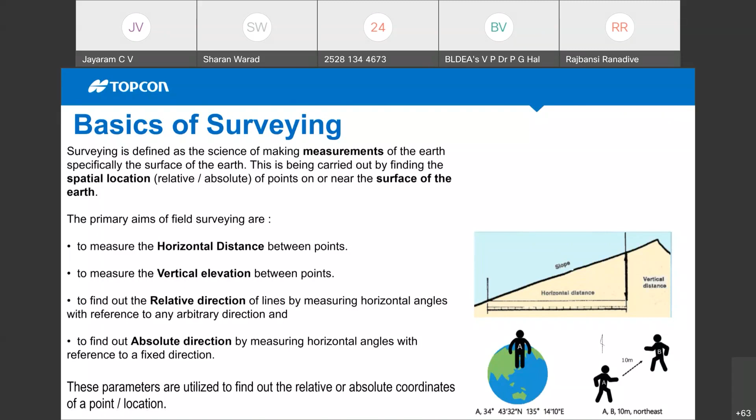We use surveying in many applications in day-to-day activities, like boundary surveys, land topography, river surveys, and the delineation of corridors for wide usages like construction of roads, tunnels, airports, and pipelines.

Basically, in boundary surveys, what we do is take satellite imageries and delineate boundaries by imposing cadastral data onto them, demarcating lands. Today the Government of India has floated a program called NLRMP, National Land Records Modernization Program, where entire cadastral data has been converted into digital maps using different surveying techniques - few states are using remote sensing, and few using codes using GNSS.

Everyone is aware that land topography maps are required to prepare detailed engineering designs for flow analysis. River foundation surveys are used to have a proper passage for ships incoming and outgoing, to remove excess sand - a process called dredging.

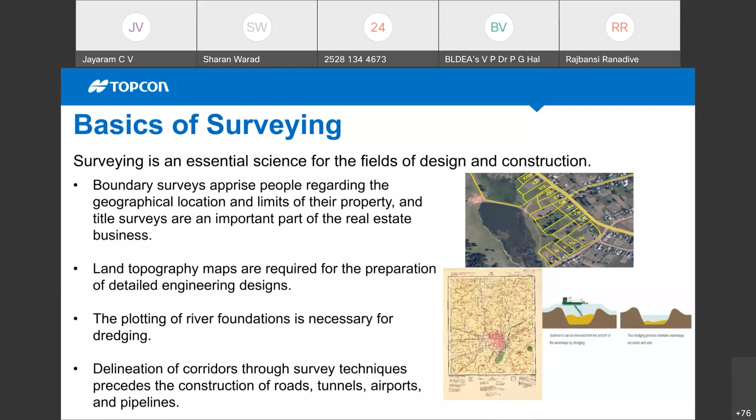We used different types of surveys for different applications.

Previously, what we used were conventional surveying techniques, like pace measurement. Pace measurement is where people walk with their feet, and a normal walking step is about 0.75 meters or 30 inches, while a double step returning to the same foot is approximately 1.5 meters or 60 inches. So that's what we used to do - pace measurements - and most commonly we used chain, tape, steel, or enforced vinyl type equipment.

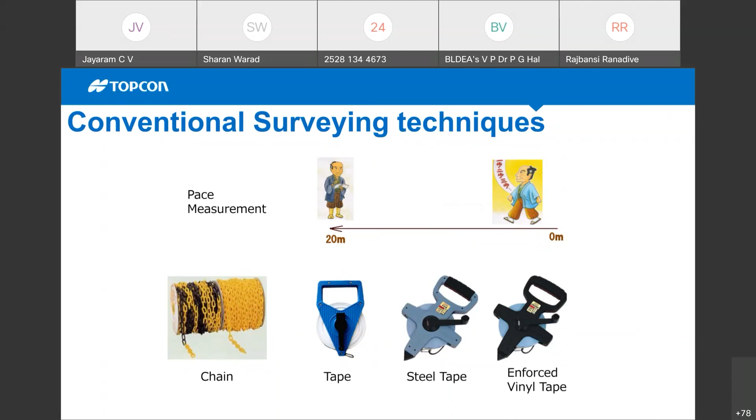By modernizing and combining different engineering platforms, today we are at the platform where we use modern surveying equipment. Today we will focus on automatic level, electronic theodolite, total stations, global positioning systems, LiDAR, and UAVs. These are all case studies which we have already done in real time, and we'll focus more on the techniques, not going deeper into the subject, as this will be covered by the upcoming speakers in their detailed presentations.

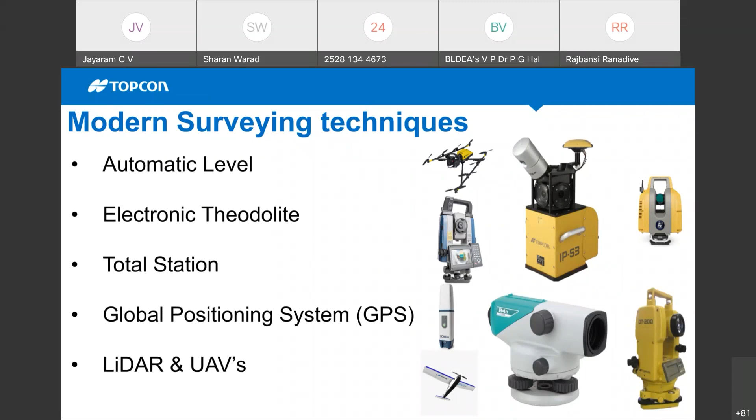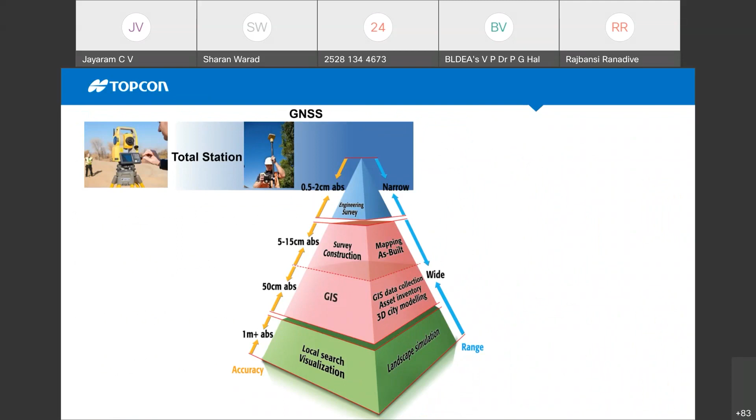So the different types of surveys will be taken as per the application and as per the accuracies which generally people tend to have. For an accuracy of 0.5 to 2 centimeters absolute accuracy for engineering surveys, basically we'll use total stations, GNSS, and 3D laser scanners.

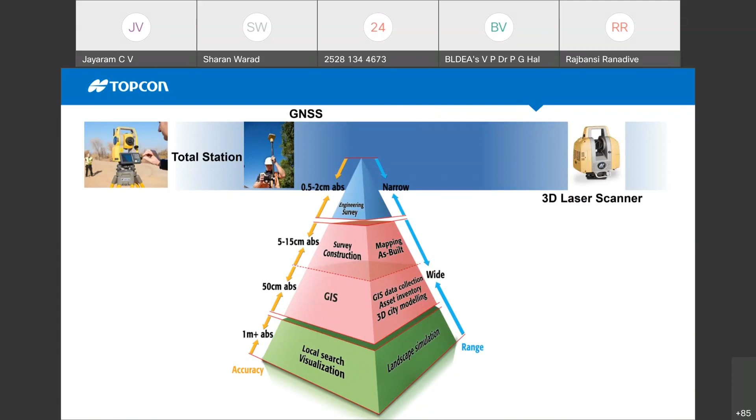For survey construction mapping as well, where we expect 5 to 15 centimeters of absolute accuracy, we'll be using mobile mapping systems or GIS, where we collect GIS data using GNSS, and on satellite images we superimpose this data, collect all that information, and present it for the required purposes. The more the range, the less the accuracy.

For having 1 meter absolute accuracy, we will use UAVs or UAS - unmanned aerial systems like drones - where we take photographs, and these photographs are then processed using photogrammetric technique, and we extract digital elevation models, digital terrain models, surface, contours, etc.

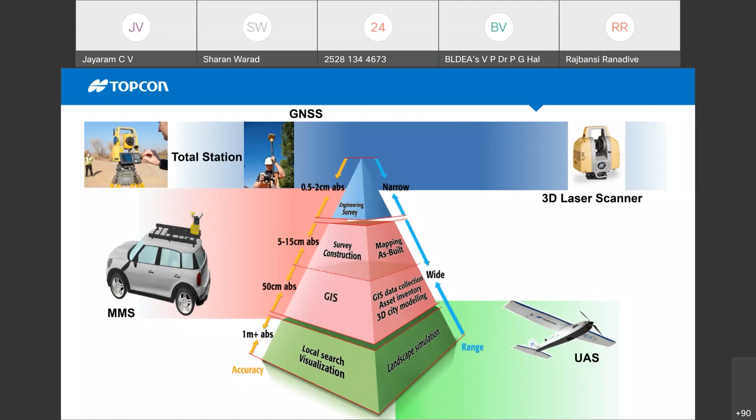So first we'll see about levels. Leveling survey - basically, though we are using all the modern equipment like GNSS and LiDAR, still for establishing the control network and to have geodetic control, we are using auto levels to have vertical control. Basically, this vertical control - people still believe in doing it with auto level itself.

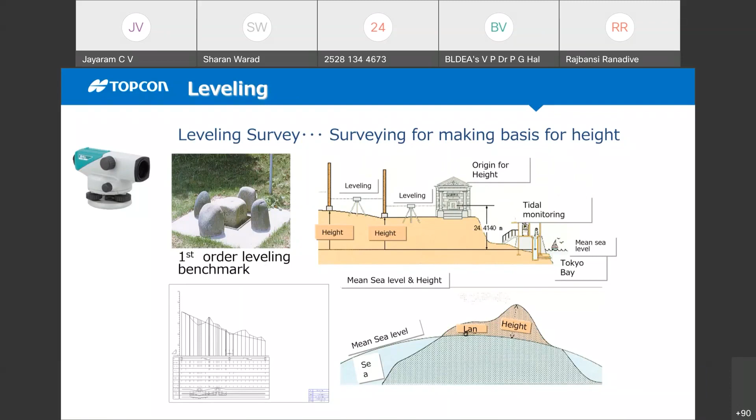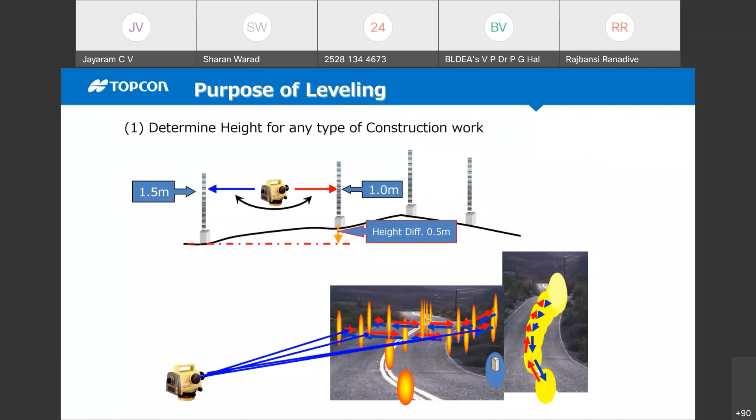By using these auto levels, we create first order leveling benchmarks, and we get MSL mean sea level heights by using geodetic corrections. So where we use this leveling is basically to get the height of a particular terrain - it could be a road or any construction site where we require this height.

In various construction works, like bridge construction, the level should be at the same height. For that purpose, we use our auto levels where all the pillars are checked to see whether they are at the same height or not, to maintain certain heights.

While installing pipes and constructing dikes to maintain the particular slope where the flow has been designed, for slope setting of drains, we use auto levels again. And even for deformation studies, where we constantly monitor a particular piece of land periodically, we can have information on how a particular area has deformed - we can use auto levels for deformation studies too.

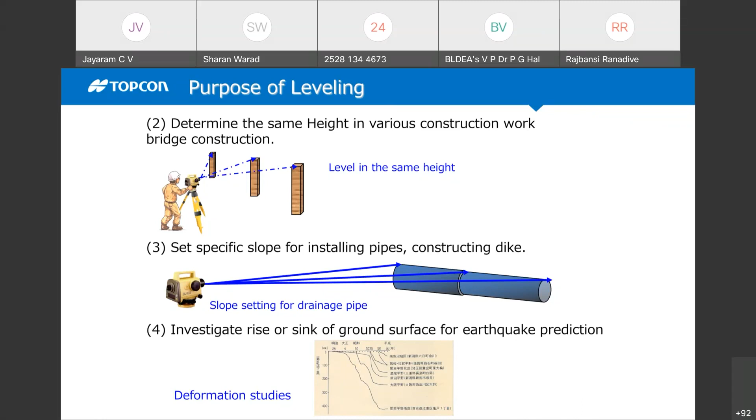Moving to electronic theodolite - yesterday Professor Dashrath sir made clear about electronic theodolite and EDM. Basically, what Topcon is offering for electronic theodolite will have an EDM built in nowadays. The electronic theodolite will have options to measure horizontal angle and vertical angle.

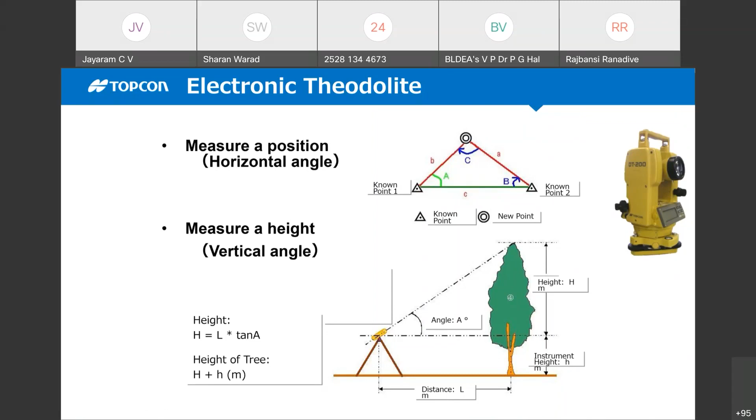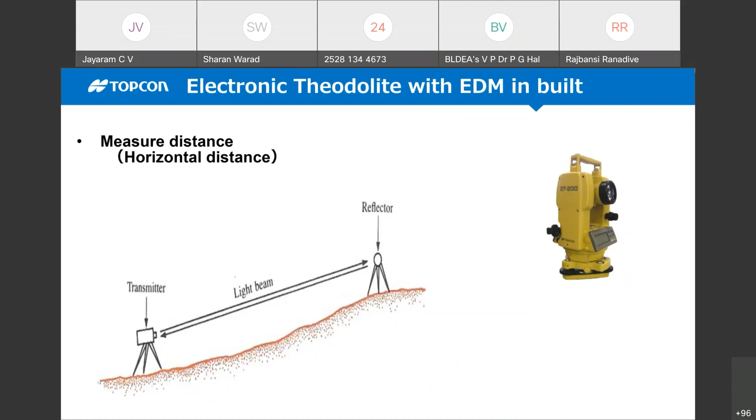Along with that, we can measure the horizontal distance - there is an instrument which transmits infrared rays, and it hits the reflector, and that reflected light travels back to the transmitter. There the microprocessor calculates the time traveled, so the particular slope distance or horizontal distance is given on the screen itself.

So there are two types of electronic theodolites. One is the optical type, where we have a protractor pattern directly - like the protractor we used in a geometry box - and we read the display on the instrument itself. The second one is digital type, where we can see the horizontal and vertical angles directly on the screen itself.

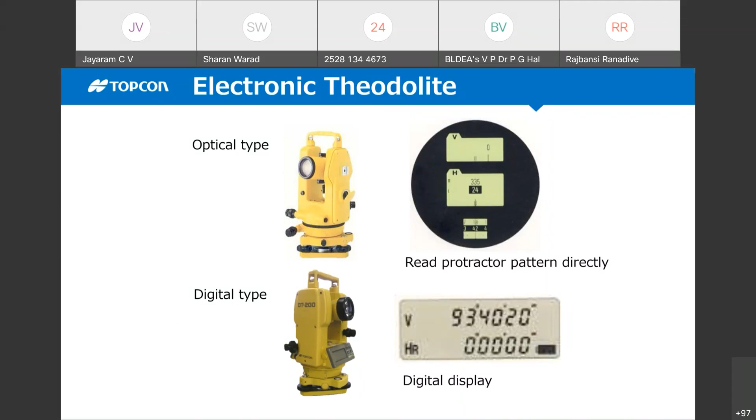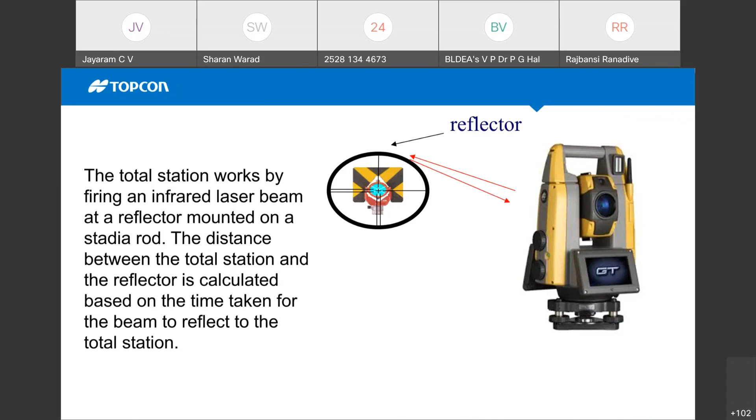Yesterday I tried to give a pictorial representation of how a total station works when we fire an infrared laser beam and a reflector is mounted. A reflector is nothing but a prism on the stadia rod which a person will be holding, or it would be kept stationary to measure that particular area. When we set this infrared rays, it will directly hit that particular prism and comes back to the station, where it calculates the beam reflection and gives the horizontal distance and angles for our design purpose.

So what types of total stations are there, and based upon different applications, the total stations will vary based upon accuracy also. There are basic type, non-prism type, Windows CE type, motor driven type. Motor driven types are nothing but robotic total stations, and also imaging type and monitoring types.

Monitoring types are very precise ones where we use them for deformation monitoring, dam structure monitoring, or any construction activities happening nearby where we require monitoring to avoid any mishap of the structure falling. For these types, we use the monitoring type, which is very precise.

So what is angle accuracy and distance accuracy? Angle accuracy, when we say 1 second, 1 second is 1 mm at 200 meters, so 50 centimeters at 100 kilometers away. When we say distance accuracy of 2 mm plus 2 ppm, ppm stands for parts per million into distance. If we roughly calculate, this is 4 mm at 1000 meters, so we can add this into the distance which we have covered.

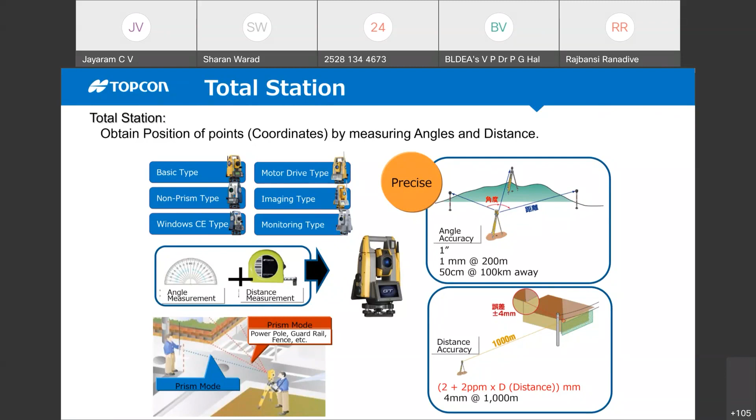Yesterday there was a question regarding the advantages of having a Windows based TS rather than a Linux based TS, so I tried to put together some pictorial explanation and a brief about that.

The advantages of having a Windows total station: we can have a calculate function on board, and we can create surface contours and do volume calculation, we have advanced loading functions, and we can do surface stakeout in the field itself with the background surface visible. We also have traverse adjustment on board, and there is a vast library to import and export formats, supporting IFC and AutoCAD as a background, and we can stake out on that particular road. These are all the additional functionalities of having a Windows total station.

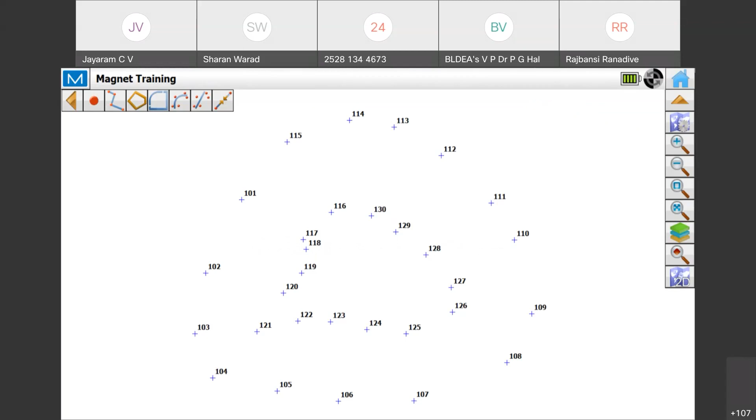So for a case study, we'll see volume calculation in an electronic total station. I have surveyed all the points for doing a volume calculation on board, doing it on board, not on any office software. So I took all these points and assigned them codes.

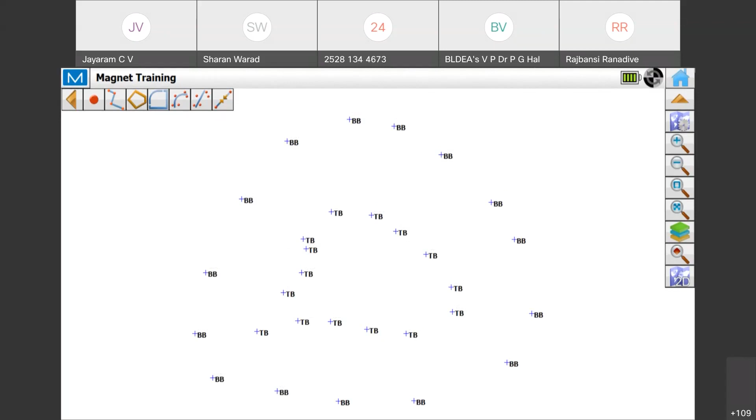These codes are like bank bottom and top bank. In order to generate a surface and calculate volume, we require two surfaces. So for that reason we took points and assigned them as bank bottom and top bank, assigning this in the code while doing the survey. Now I will quickly run through a video showing how to calculate this particular volume calculation on board in the field.

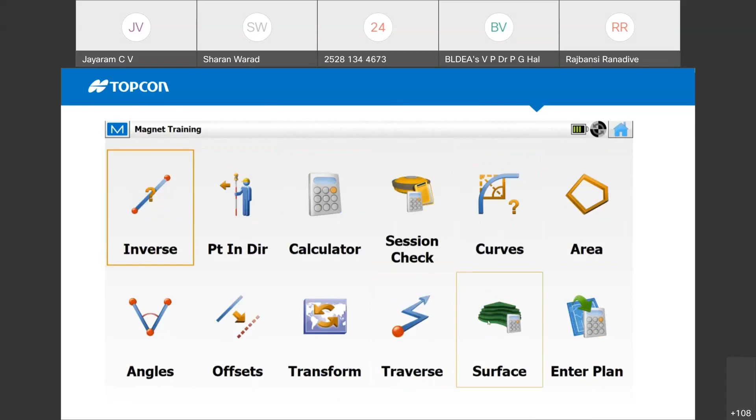So these are all the options we have on board. We are creating a volume and adding the points by code. As I mentioned, the bank bottom I already took and created as the bottom surface. Now I am going to give another surface which is the top surface, and for that I have already taken this set, assigned as TB, so it's automatically fetching with the help of the code I assigned in the field. Now I've created both surfaces.

My surface has been generated. You can see the volume along with the contours in the intensity view. So this is my original surface, and this is my bottom surface. So we can have a surface volume calculated in the field itself. You can see that the fill needed is 3,138.299 cubic meters in this particular area.

So again, another advantage of having a Windows total station is working with road data. While we have a design file of that particular chainage, say 45...

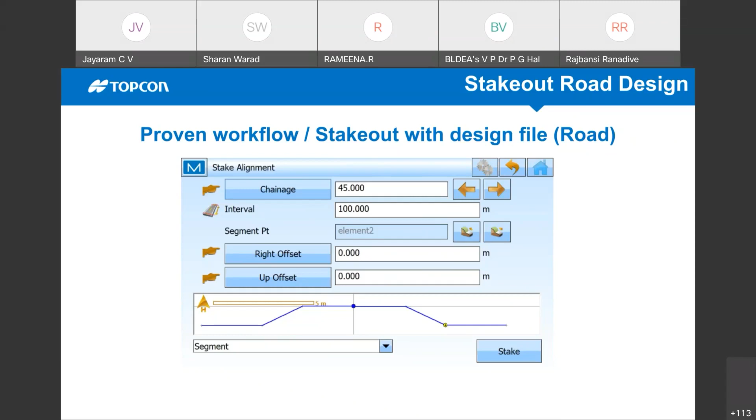Once we inserted this particular chainage as a drawing, we can stake this data based upon that particular berm edge and toe. We can stake this. We can have this original design data in our total station, where we can check the cut and slope in the field itself.

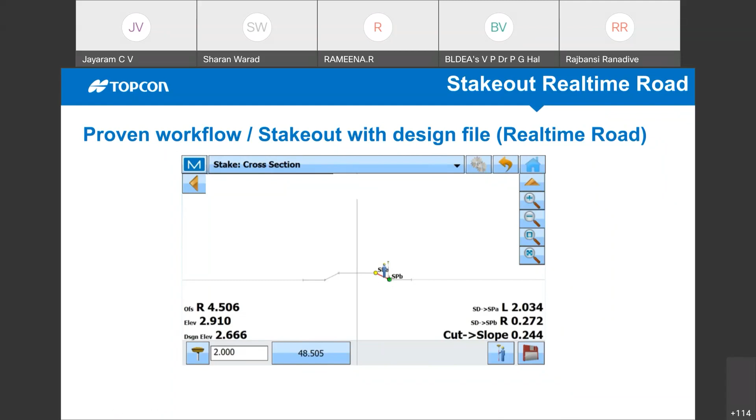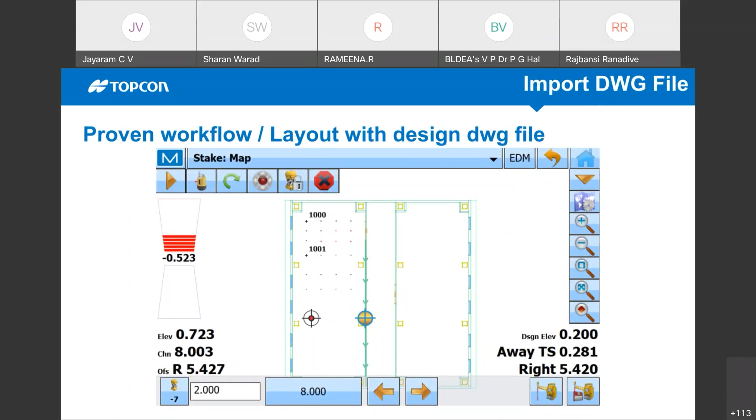So as I said, we'll have a vast library of import and export formats. While we are doing the layout, we can have a drawing as a background, and we can have this in the field to avoid any further confusions. So we can also have this IFC data. IFC is nothing but BIM data, where we can have as-built drawing files and IFC data too.

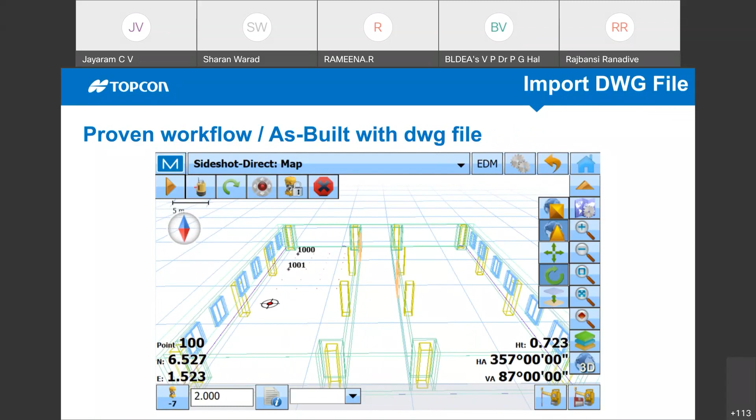And we can ask our team persons to seamlessly connect. Once we complete the survey, we need to send this data, and for that we need to download it, connect it to the laptop, connect a USB or cable to the COM port, and the data needs to be downloaded from the total station back to the laptop, and from that laptop we need to send it to the office.

In that case, there could be probable chances of error while sending different files rather than the intended one. To avoid such confusions, we have a seamless connectivity option with a Windows total station, where we'll have office-to-field connectivity, like Magnet Enterprise, which is a cloud-based platform where we can send data to field and field to office. This is seamlessly connected.

So, in order to avoid more confusions in the field—because if we hand over some data to the design team, we are not sure that particular data will reach the field in the same manner—to avoid such confusions, we can have this enterprise system, and this will be enabled while we are having this Windows-based total station.

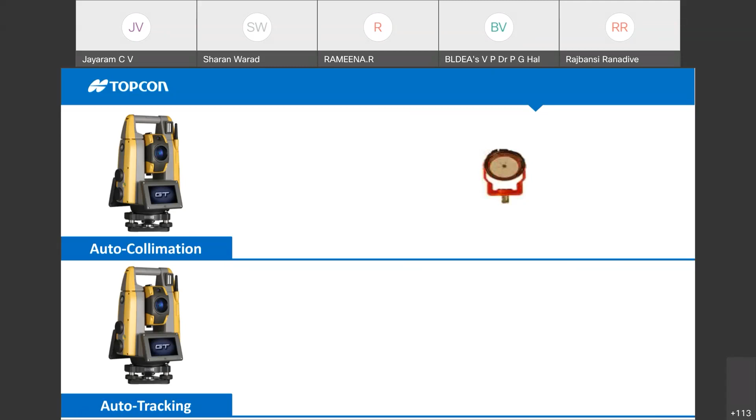So for that, the surveyor needs to strain a lot. There could be eye fatigue cases, and it's a time-taking process too, with probable manual errors that may occur.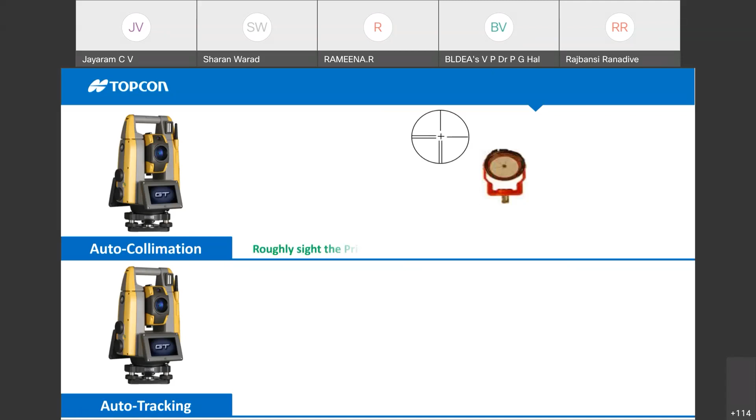To avoid that, and with the advantage of having a robotic total station, what the auto collimation function does is you just need to roughly sight the prism, and it will do its job. It will directly find the accurate center, so that our job becomes very easy and we'll have accurate data too.

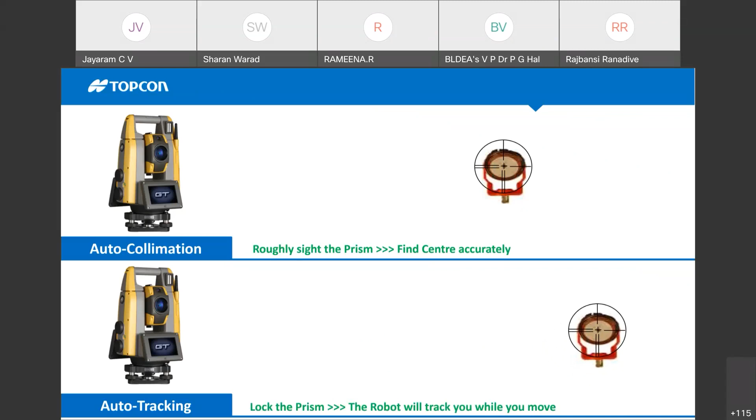So next, what is auto tracking? With this auto tracking function, once we bisect the prism and lock onto it, the robot will track you while you are moving. So these are the advantages of having robotic total stations.

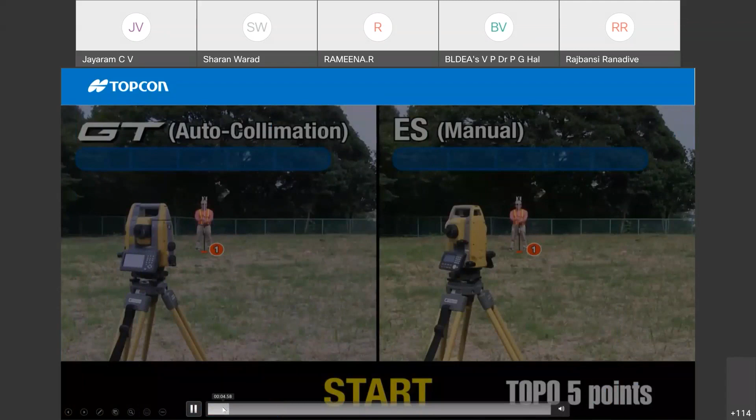So here's a small video comparison of what we discussed—the auto collimation function versus manual total station time. We'll see the time elapsed here. The person is assigned to take five readings. On the left is the auto collimation robotic total station, and on the right is the manual total station.

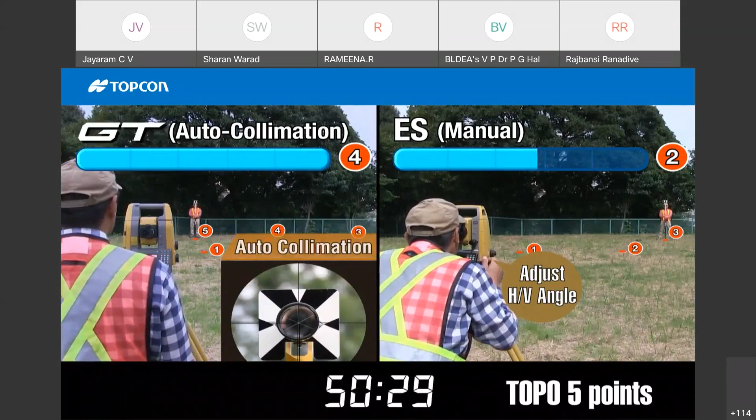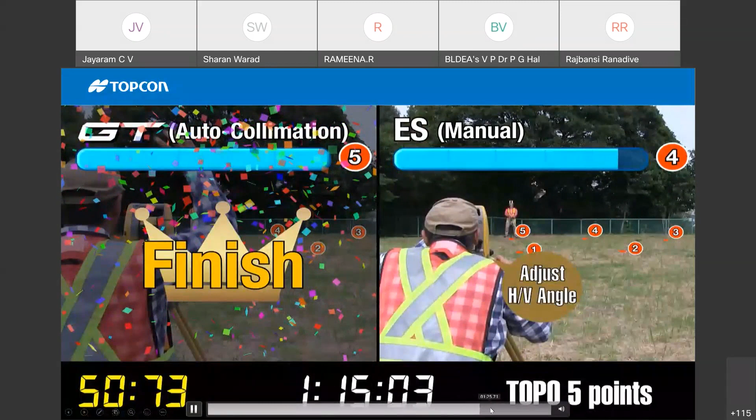With the auto collimation function, this person is already finished his job, while this manual guy is taking his time to finish because he needs to adjust the horizontal and vertical angle and look into the telescope again and again. So finally he finished. If we see the time comparison, it was like 1.5 times faster than the manual total stations.

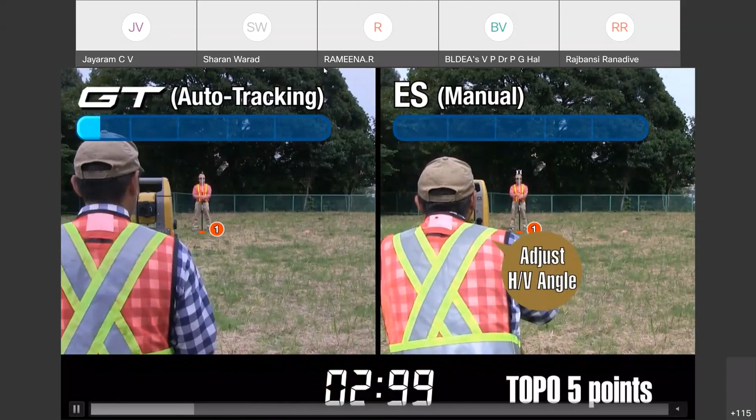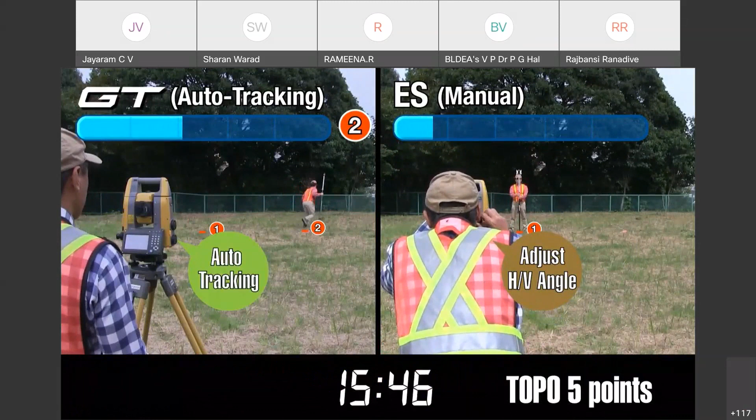So this is an auto tracking function, a small video again. While having this auto tracking, once he locked the auto tracking prism, it will automatically take the topography points, and the person needs to do only is shoot the trigger button. While the manual person needs to do horizontal vertical angles, and he needs to look through the telescope and press that trigger button in order to take that particular point.

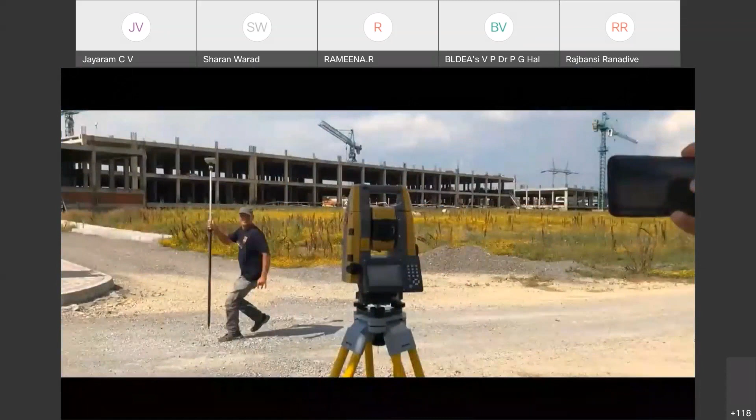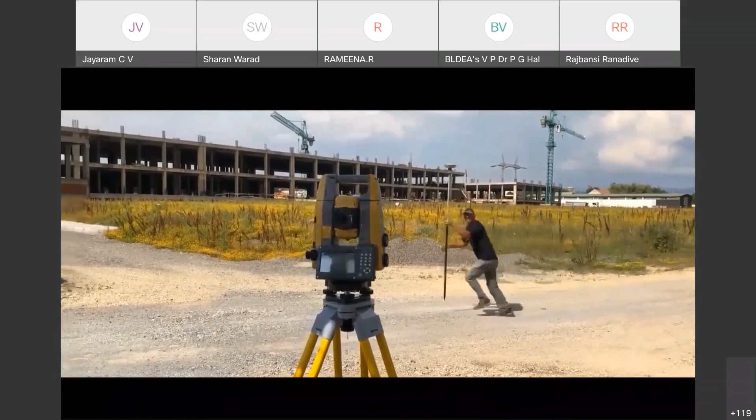So again the comparison goes, and he almost finished in a very less time comparing to this one. And to show the auto tracking capability of the robotic total station, how fast it will track you. These total stations have 180 degrees per second tracking speed, rotations per second. See wherever the guy is moving around, it was following him, and the prism is not getting lost. So these are all the few advantages of having a robotic total station.

So as I said, the very precise one, what are the advantages of having monitoring total stations? This is 0.5-second accuracy monitoring total stations, which we use for displacement and deformation monitoring.

When we are discussing deformation monitoring or displacement, there are multiple targets kept, and this monitoring total station needs to automatically check all the prisms. It should not take the one which is near to the instrument, and it has to be taken in a particular pattern to do the analysis, for the software to get that accurate deformation monitoring results.

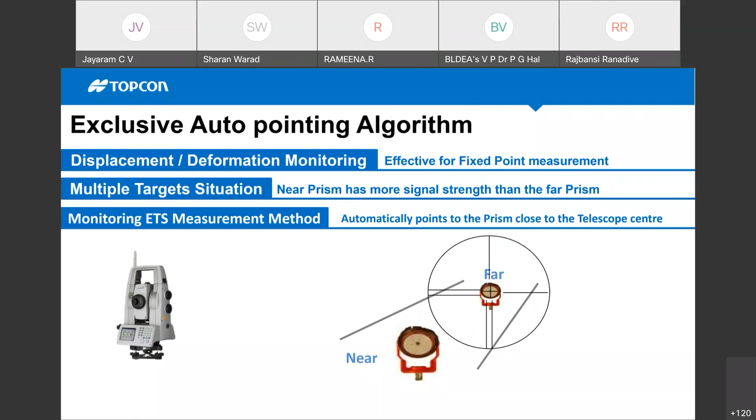So it has to check in the particular format, and it should not check the one which is near to the instrument. In a standard total station, what it will do is check the prism which is close to the instrument.

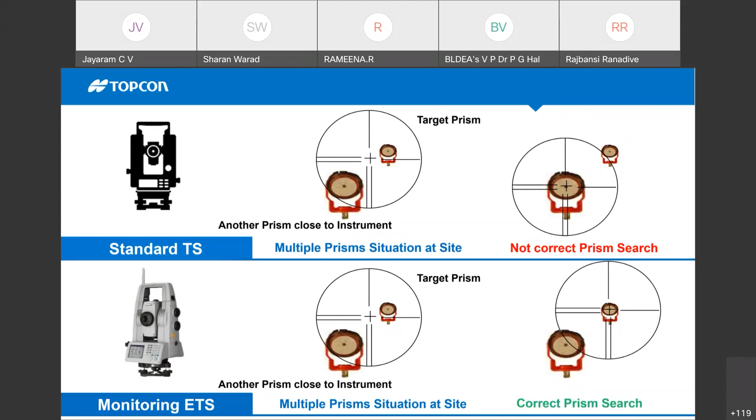See, this is not the correct prism search for deformation monitoring, because there are multiple prisms assigned. So the correct pattern to check is it needs to check the far prism first, then the one which is closer to the telescope. So these are all the few algorithms which have already been assigned for the monitoring total stations, which is very precise in nature.

So there is another algorithm to check multiple prisms, like this pre-scan algorithm, where we take a case study of a particular dam. We assign all the prisms at different locations.

So it will automatically search as per the algorithm which we set, and it will send the results periodically. If we ask that robot to track in a particular time period, for example 30 minutes or 1 hour or 12 hours, it will directly trigger that particular algorithm, and it will have all the station data, and it will send data to the software to calculate all the location data, such that the deformation monitoring can be monitored.

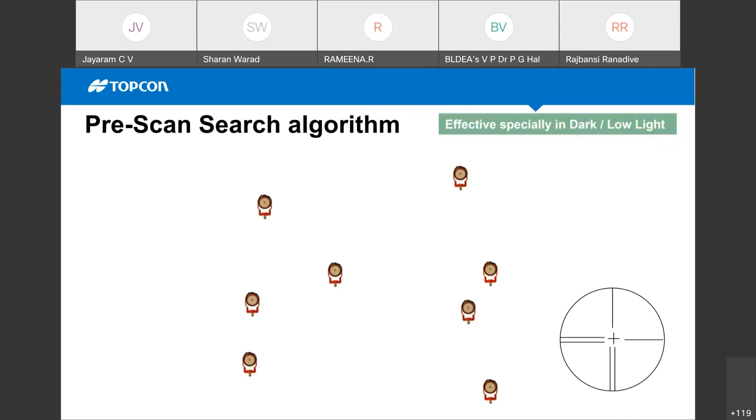Especially where there is low light, this is another beautiful function: inside tunnels there could be no light in some cases. So this is the function where we have target illumination in tunnels. When we switch on this particular illumination in tunnels, the prism sheets which we have already placed will illuminate, and we will have an option to continuously ask it to blink, so that it will be easily identified and easily measured.

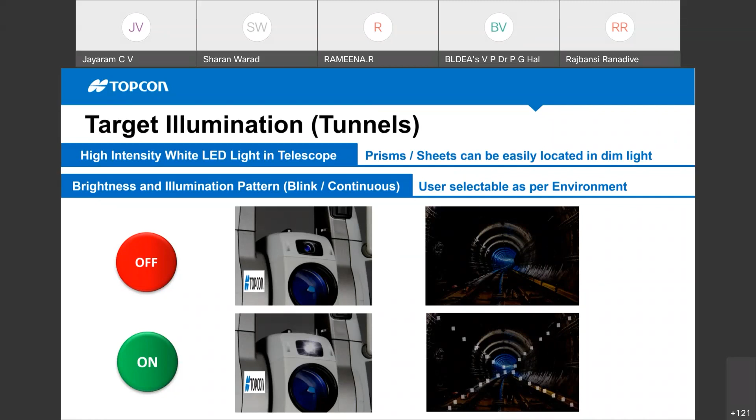So another function is the update rate. What we have seen in the last video is the robot tracking that prism. For the tracking prism, the position needs to be updated periodically to the robot, so that we'll have access to see it on our monitors. Earlier it was a position update rate of 2 to 3 hertz. Now the latest position rate has come to 10 hertz.

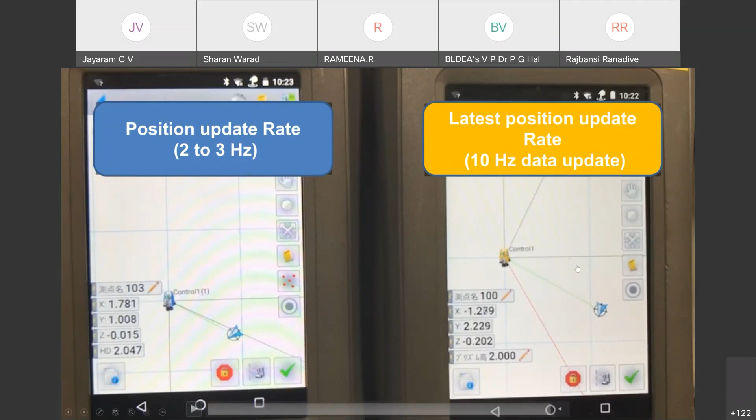I request you to please look at both screens simultaneously. See, when we have a low position rate, the prism is moving like this, and when we have a high position rate, it was moving very smoothly. So these are all the few updates.